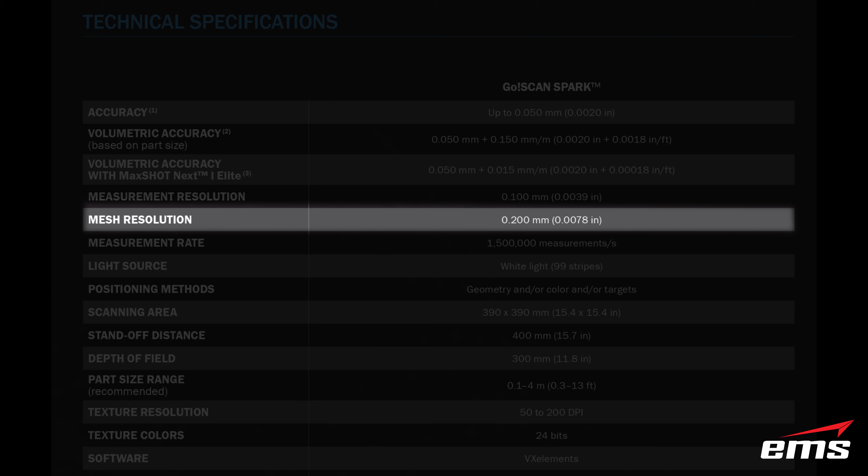So let's start with the technical specifications. Now, technical specs don't always tell the whole story, but it's important to review them, and we are going to focus on the key specs for each 3D scanner. First up, the GoSCAN Spark. Now, the GoSCAN Spark has an accuracy of up to 0.002 of an inch. It has a mesh resolution of up to just under 0.008 of an inch. That's the density of the mesh, how tight of a mesh you can make.

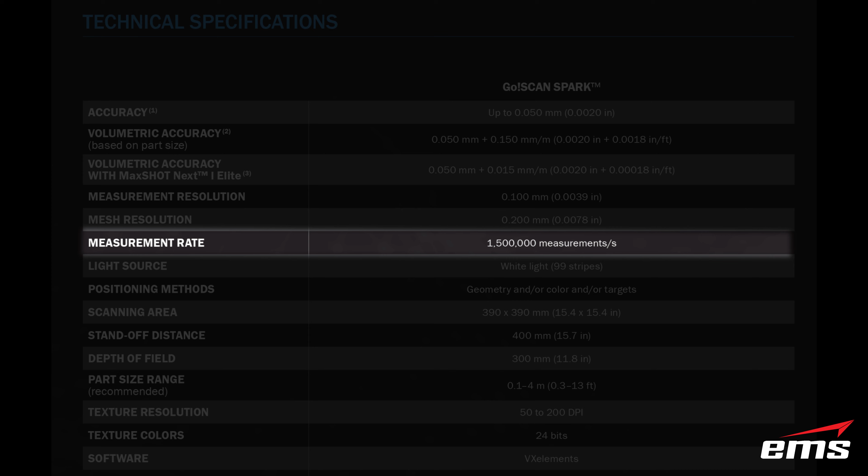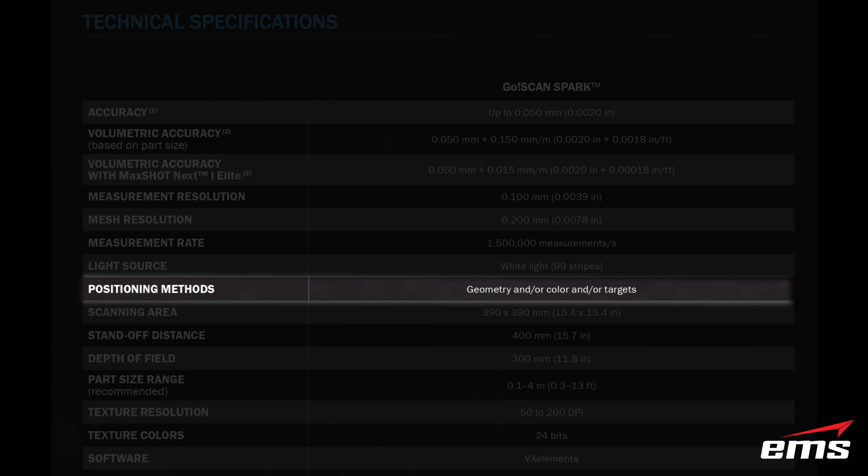It has a capture or measurement rate of up to 1.5 million points per second. And the light source, the projected light, is an LED light, and it has 99 lines that it projects out. The GoSCAN Spark uses 3 different positioning methods, basically how it tracks itself in space. And those can be geometry, targets, and texture, and a combination of all 3. So, for example, you could track just geometry, or geometry and targets, or geometry, targets, and texture.

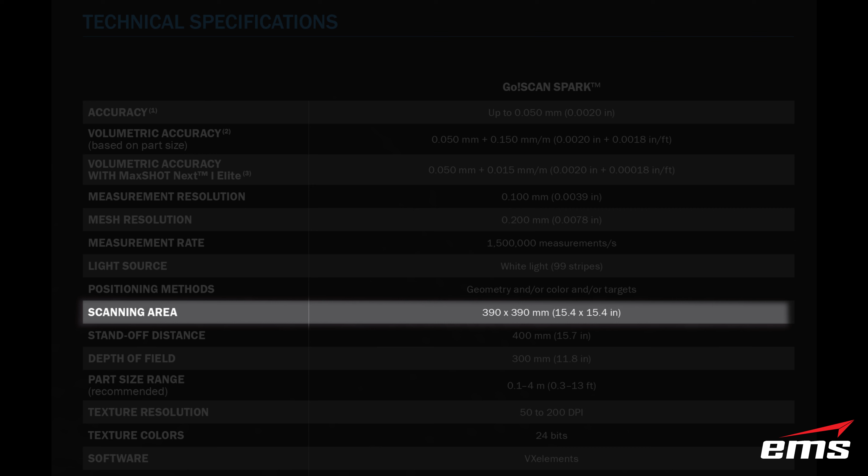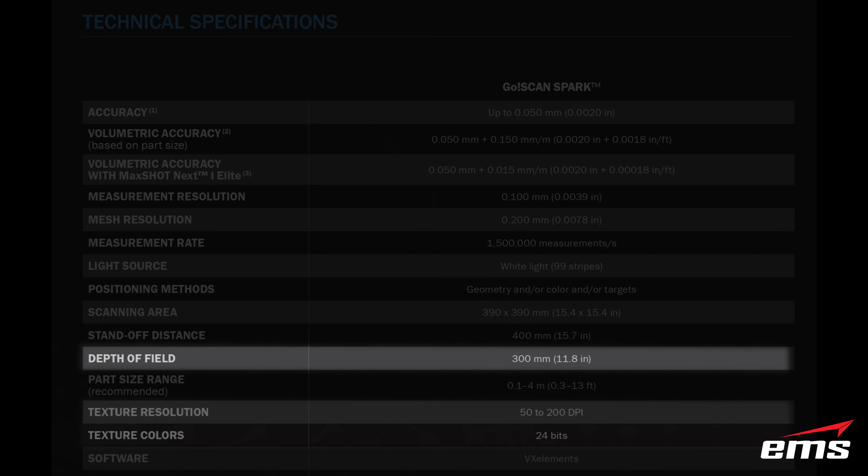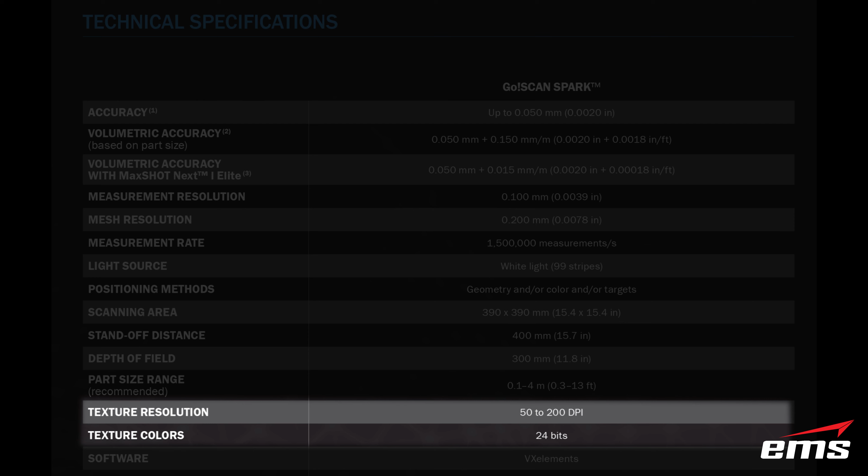The scanning area is quite large. It's 15.4 by 15.4 inches square. That's how big of an area the scanner can see and capture data. And the standoff distance, which is how far away you have to hold the scanner from the part, is 15.7 inches. And the depth of field, that's basically how deep the scanner can see and collect data, is also good size at just under 12 inches. Now, since this scanner captures color, the texture resolution can be adjusted from 50 to 200 dpi, and it's 24-bit color. So those are the main specs of the GoSCAN Spark.

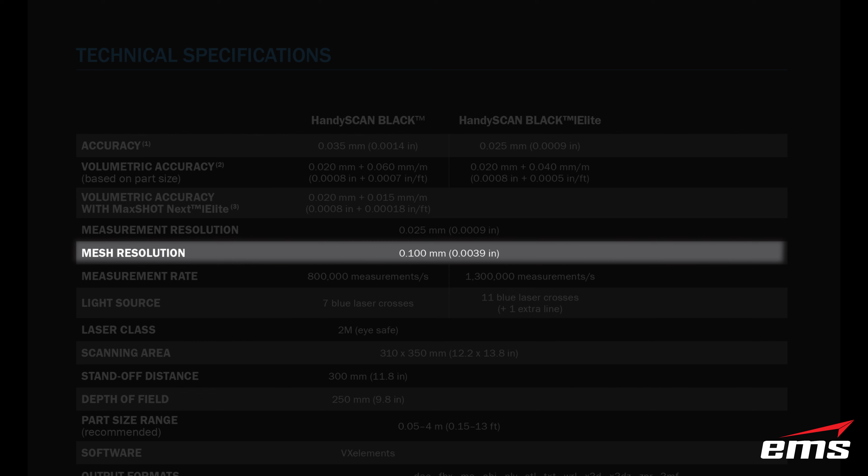All right, next up, the HandySCAN. Now, the HandySCAN comes in 2 models, the Black and the Elite, and we'll talk about both of them. Starting with accuracy, the Black has an accuracy of just under 1.5 thousandths of an inch, and the Elite has an accuracy of just under 1 thousandth of an inch. Now, they both share the same mesh resolution. That's, again, the density of the mesh, of just under 4 thousandths of an inch.

And the measurement or capture rate on the Black is 800,000 points per second, and on the Elite, it's 1.3 million points per second. Now, the light source is a blue laser, and in the Black, there are 7 lines, and in the Elite, there are 11. Now, there is a prism in there that actually splits the laser and emits 14 and 22 laser lines. And the Elite has what's called single line mode, which allows it to get into small holes and narrow cavities and pick up more detail. Now, both scanners are laser class 2M, and that is eye safe.

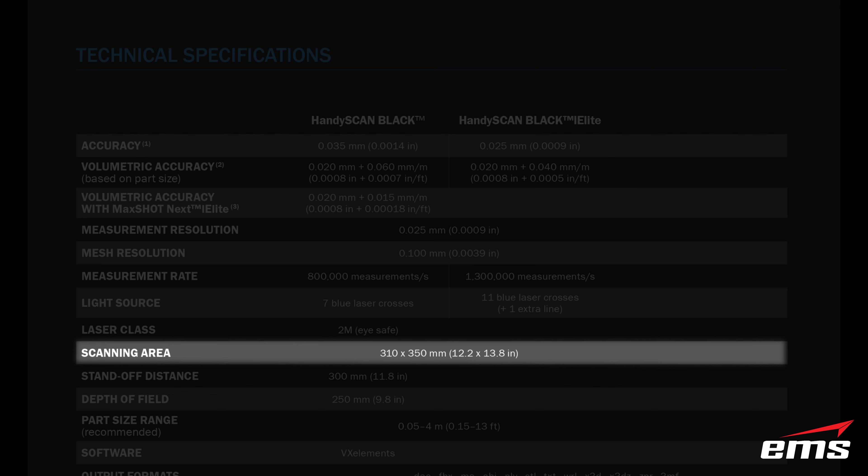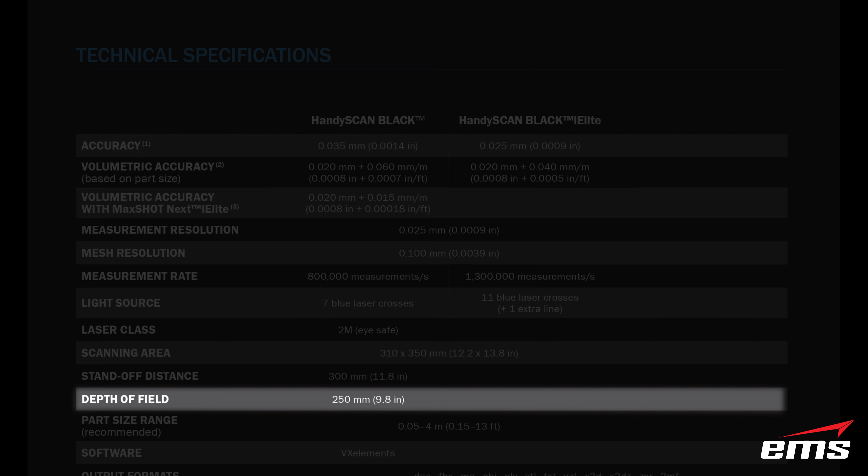The scanning area is the same for both at 12.2 by 13.8 inches, so just a little bit smaller than the Spark. The standoff distance is 11.8 inches, and the depth of field is 9.8 inches. Now, it's not mentioned here, but the positioning method is targets. It does require targets at all times to position itself. So the specs are great, but they don't always tell the real story. So let's discuss some real-world situations and see how each 3D scanner performs.

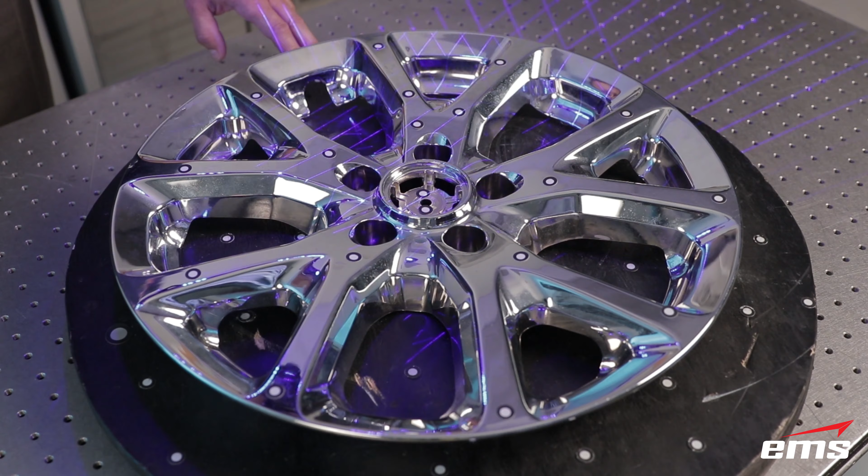Starting with surface types, this is where the HandySCAN Black will have some advantages. If the part is extremely dark and or shiny, the HandySCAN Black is able to 3D scan without developer spray or some other method to dull the surface. The GoSCAN Spark does surprisingly well on most surfaces, but can be a challenge on those extremely dark or shiny. The one surface type that both scanners will have a challenge on is anything that is highly translucent or clear. There is just no light that returns back to the sensor.

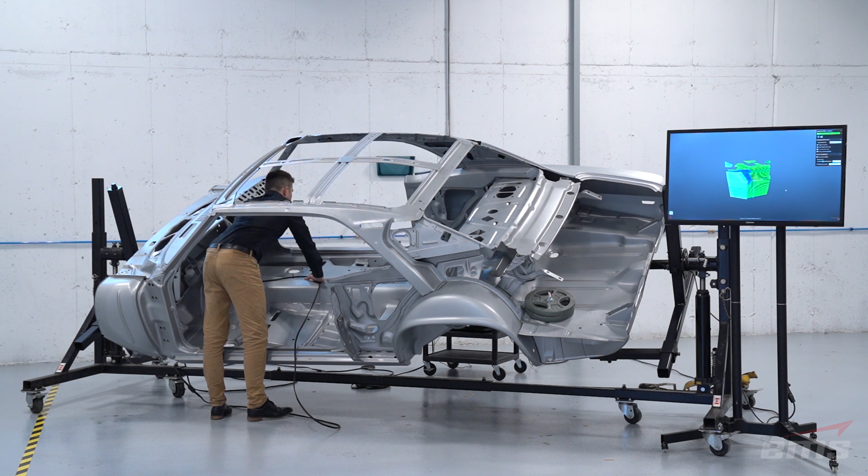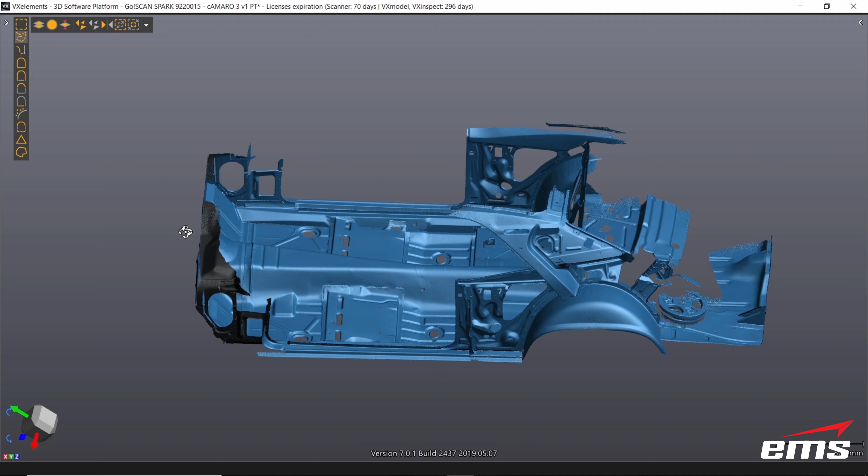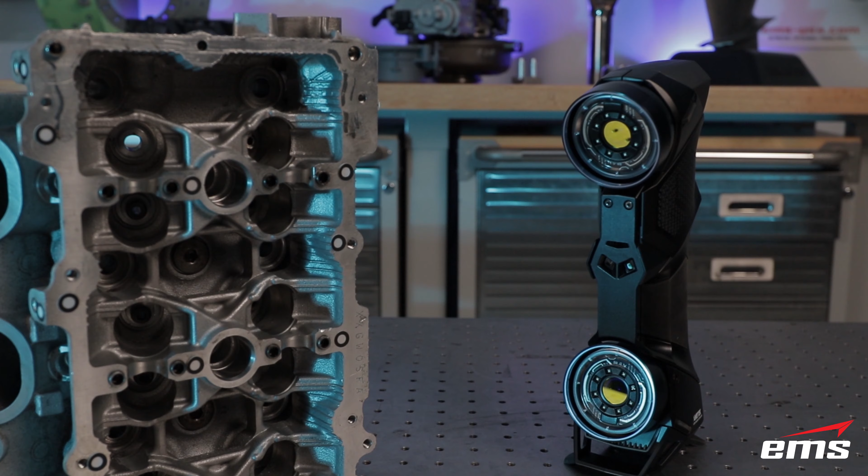Now let's talk about speed. Speed is important, but so is the quality of the 3D scan data. 3D scanning too fast can lead to missing data or lack of detail. With that being said, speed does help you get more done in less time, which can be critical. In ideal conditions, the GoSCAN Spark will 3D scan faster than the HandySCAN because of its larger capture area. If no targets are needed, this can add to even more time savings. However, if surface conditions are challenging or fine details such as very small holes or other fine features need to be collected, the HandySCAN Black might be the better choice.

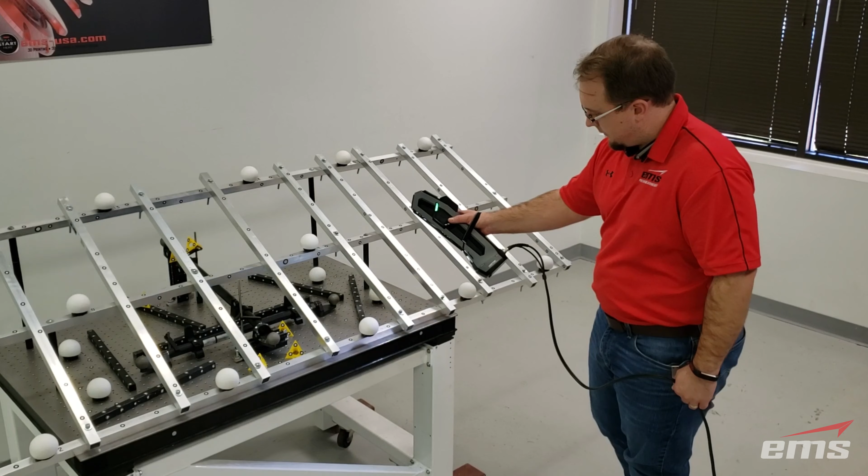Accuracy is one of the first questions people ask us about these 3D scanners, and we have performed a variety of our own accuracy tests with both 3D scanners, and they seem to hit their stated specs pretty well. However, the HandySCAN is ISO 17025 certified, meaning it's gone through a stringent process to be certified, and you can expect those stated results. The GoSCAN has not and is not as accurate, but for its intended purpose, it performs extremely well.

If inspection is one of your key criteria for using a 3D scanner, you might want to opt for the HandySCAN. If not, then other factors should be considered.

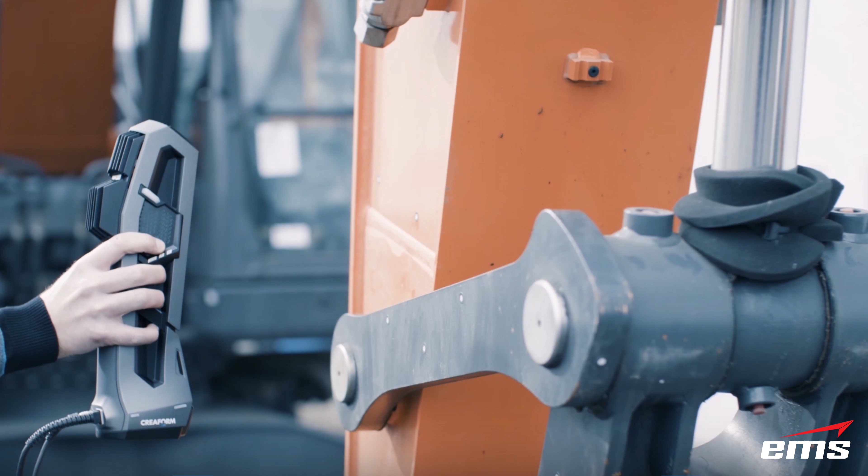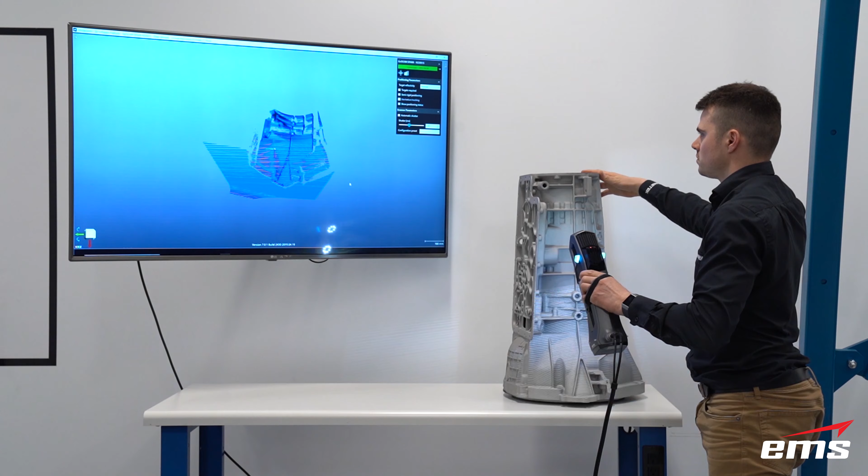Ease of use. Both scanners are winners here. They are both extremely portable, offer simple and fast calibration, easy setup, and both systems use the same VXelements software to collect and edit the 3D scan data. You really can't go wrong from an ease of use point of view with either system. If you can get away with no targets, then you could argue the GoSCAN Spark is easier in the sense that you don't have to target anything to start scanning.

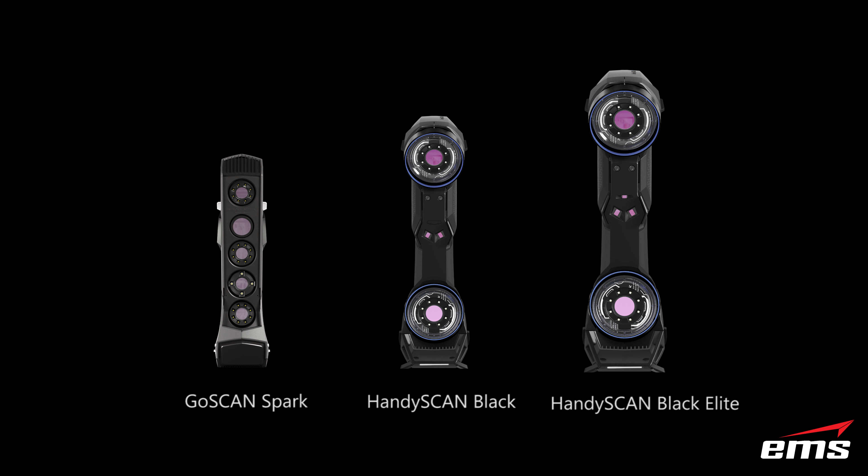Now, we haven't actually talked about price because it does vary from country to country, but we will talk about price differences. The GoSCAN Spark has the lowest cost of the three scanners, with the HandySCAN Black coming in at about 25% more expensive than the GoSCAN Spark, and the HandySCAN Black Elite is about 35% more expensive. What you should do is not just look at price, but which scanner offers you the best value based on your needs and requirements.

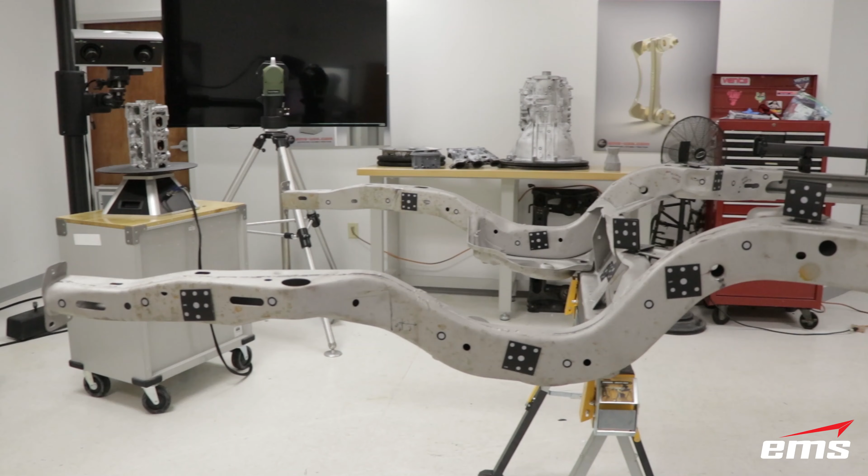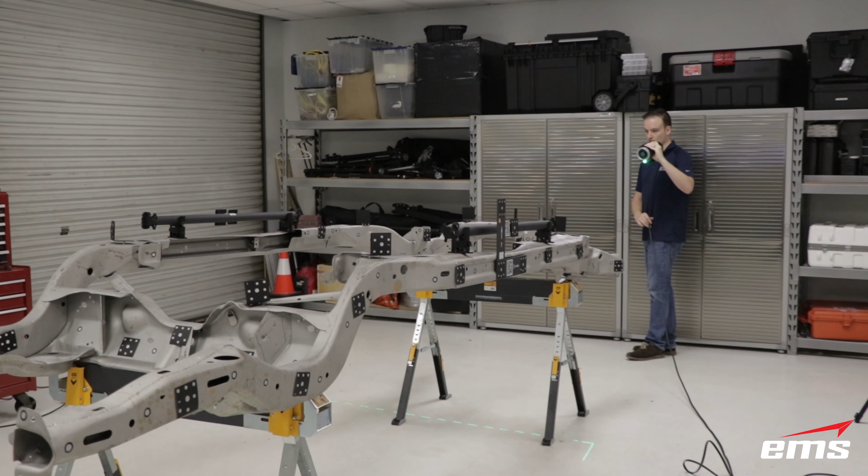Now, what about accessories? Both systems can take advantage of additional Creaform products such as the VX Model and VX Inspect software and the MaxShot photogrammetry system. What is photogrammetry? Without getting too technical, it is a way to improve accuracy on large parts. When you are 3D scanning a large part, you start to introduce a stacking error, meaning as you move farther away from where you started scanning, you will continue to increase your inaccuracy. Photogrammetry helps control this using a camera system, coded targets, and scale bars.

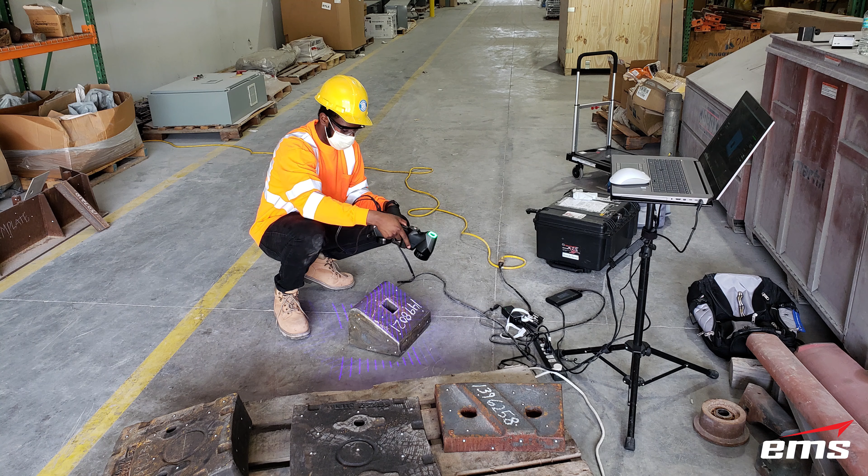Environmental conditions. Both scanners work very well in an office environment as well as harsh shop floor conditions. We have taken these scanners out in some pretty dirty, dusty, oily, noisy, smelly, vibrating, loud, hot, and cold environments with no issues. The one condition that the HandySCAN will work better than the GoSCAN is in direct outdoor sunlight. Being laser-based, the HandySCAN is less affected by the sunlight. The GoSCAN is merely a projected LED light, and the sunlight will wash it out. In cloudy or morning, evening conditions, you may be okay, but if you are also trying to scan a dark or shiny finish, it may be difficult to impossible with the GoSCAN Spark.

Scanning in color. This is an easy one, as the GoSCAN Spark is the only scanner in this comparison that can directly 3D scan and capture color. For the HandySCAN Black, a secondary process of 3D scanning the part and then either taking photos or downloading images or texture maps and then wrapping them onto a part using additional software would be your only option.

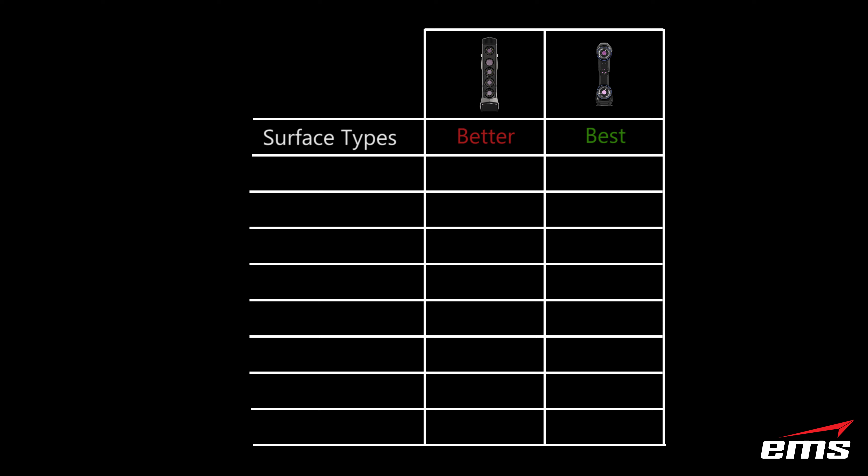So in summary, if we were to rate the scanners as good, better, and best, starting with surface type, the GoSCAN Spark does a pretty good job, but the clear winner here is the HandySCAN Black, with its ability to scan dark and shiny surfaces with no surface treatment. Moving on to scanning speed, the clear winner here is the GoSCAN Spark, with its larger scanning volume and 1.5 million points a second. In addition, many times no targets are required, which makes the GoSCAN Spark the fastest scanner. As far as accuracy goes, the HandySCAN Black and Black Elite are ISO certified at less than 1.5 thousandths and 1 thousandth of an inch, depending on the model.

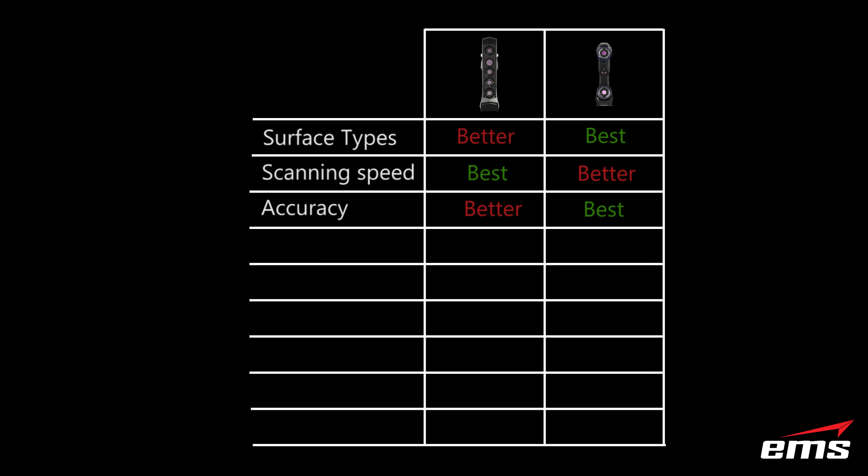Next up, looking at ease of use, both scanners are extremely portable, very fast to calibrate, and only take a few minutes to get up and running, making both of them a great choice. Even though these scanners are at different price points, they offer an exceptional value when you consider their cost, speed, accuracy, portability, and ease of use. Both are clear winners in their respective segments. Both scanners offer accessories such as photogrammetry, inspection, reverse engineering, and analysis software, making them both great values for future use and add-on products.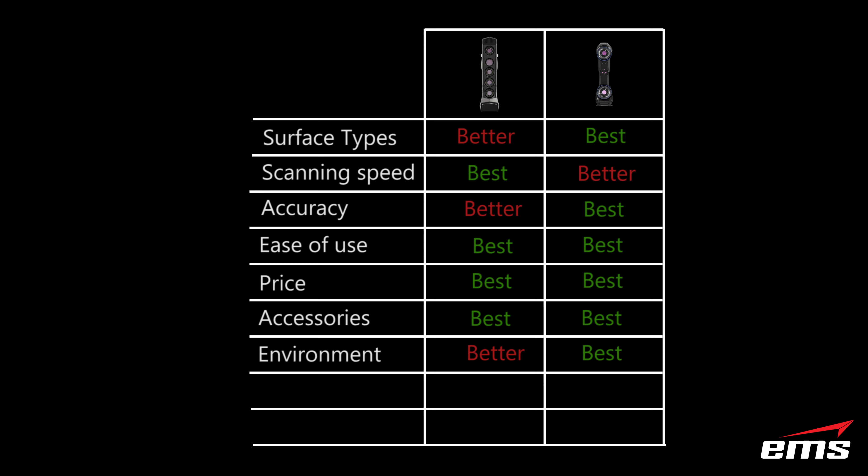In regards to environmental conditions, the GoSCAN works pretty well in most conditions. However, the HandySCAN Black would be the clear winner in the harshest of conditions, such as direct sunlight. With color being a built-in option for the GoSCAN Spark, it definitely wins this category. It can be done with the HandySCAN Black, but it would require additional steps and software. So what's the best scanner for your needs? Well, if color, speed, value, and ease of use are the top of your list, then the GoSCAN Spark is an excellent choice. If you require higher demands in regards to accuracy, surface finish, and environmental conditions, the HandySCAN Black is the best choice.